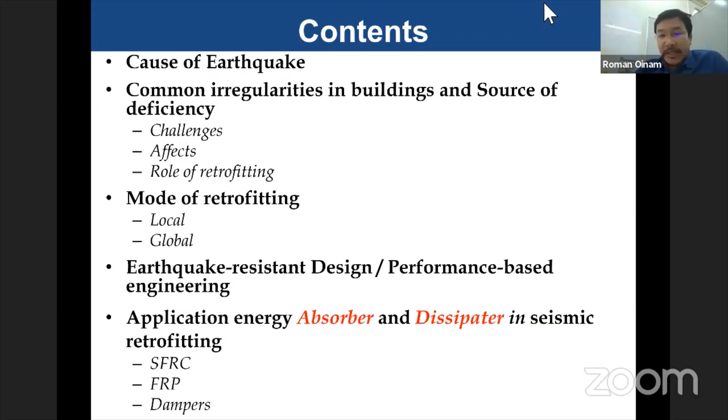First, let's focus on how earthquake came into the picture. Many people already have personal experience of earthquake in real life, and some of us don't have that type of experience. So earthquake can be classified into two ways: one is natural and one is man-made. Under natural, tectonic movement is one of the major causes for earthquake, along with volcanic eruption and rock faults. These three are the major contributions from the natural source point of view.

And from the man-made point of view, like a blast, reservoir induced, and mining induced - these are the man-made earthquakes. So for me, I will focus more towards the natural based earthquake, especially this tectonic movement.

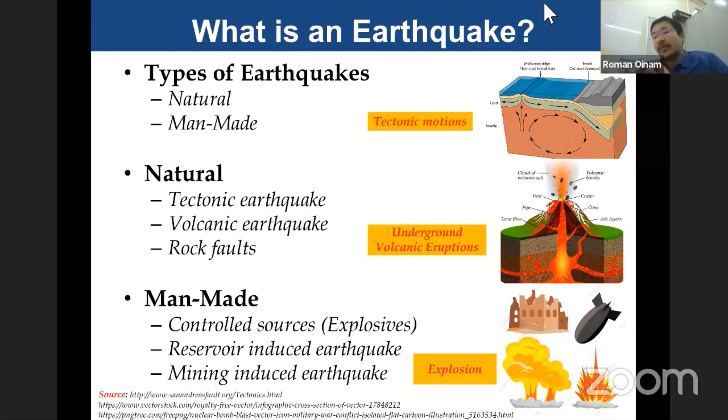Before coming to tectonic movement, let's look at the past history of our Earth. If you look back 225 million years ago, our Earth's crust was a kind of solid plate, interconnected. Inside our Earth, the inner core and mantle area is a liquid base, and highly radioactive material. Due to Earth's movement, the inside liquid keeps moving in different directions, and due to this radioactive element movement, positive and negative polarities develop, and due to that polarity, the plates are moving relative to each other - some are repelling, some moving away from each other.

That movement started a long time back, and due to that movement 135 million years back, the plates started splitting from each other. Coming to 65 million years back, the plates moved further apart. So this is the current status of our Earth, and right now our country is here. This is a small history about our Earth's crust.

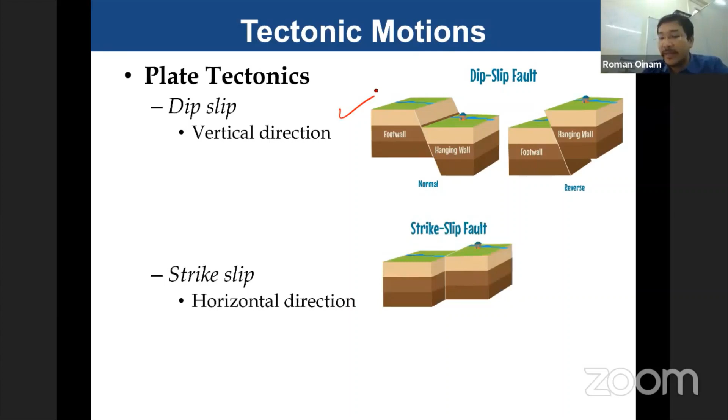Now let's come to tectonic movement. Due to Earth crust movement, some plates are repulsive, some collide, some slide, and due to sliding, earthquakes might be caused. This sliding can be classified into three ways: one is dip slip, meaning vertical direction, where plates slide vertically; second is strike slip, a horizontal type where plates slide horizontally; and third is oblique, a combination of vertical and horizontal. So it's quite complicated - based on this movement, different types of earthquakes come into the picture.

Today I will not talk very deep about these earthquakes. There's S wave, L wave, different kinds of waves, and these waves will be generated based on this type of deformation.

Dr. Romanbabu, sorry for interruption - there is a background noise that is coming, could you please check? Okay, sure, somebody is speaking I think. Otherwise use earphones so that it's clearer.

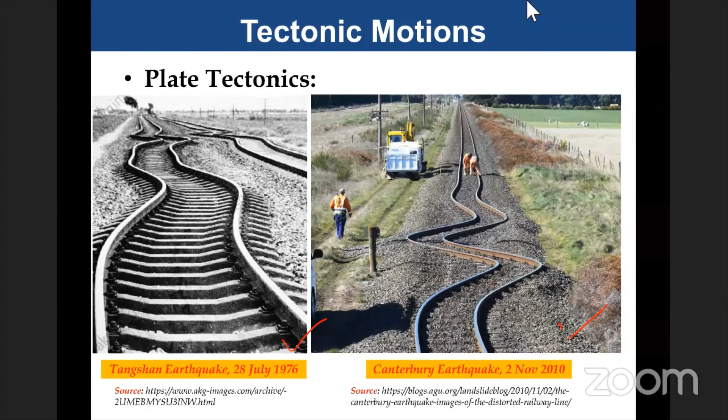No noises at this moment. So now again some of this tectonic movement can be observed. These fault lines, actually the two tectonic plates might be merging with each other, and that merging can be visible from the clear eye also. So some are visible, some are not visible.

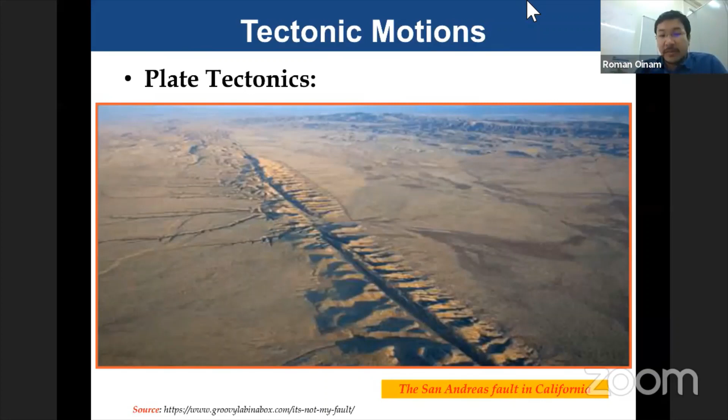Now coming to the Indian scenario. As I mentioned, 225 million years back the tectonic movement started, and the Indian plate, which was quite new, kept moving towards the Eurasian plate due to that movement. The Eurasian plate is on this side and is quite old compared to the Indian plate. Every year the movement is about 5 centimeters per year, and at that speed the plate is moving.

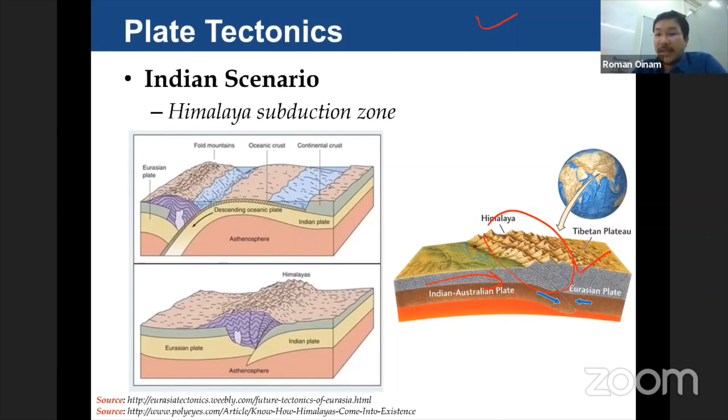So due to that, once an earthquake is generated from the crust or mantle region, the earthquake wave will be generated in multiple dimensions, and it might be a surface wave or a body wave. In case of the surface wave, it comes on the surface, and based on whether it's surface or body wave, the failure pattern in the structure is also different.

I'll give you one example of how an earthquake occurs and how this wave is generated. Sometimes we hear the terms aftershock and foreshock. The foreshock occurs before the major earthquake hits, at least a few seconds before, when some small tremor might come. That's called a foreshock. Aftershock means just after the major earthquake, some small intensity earthquakes keep being generated. That is called an aftershock.

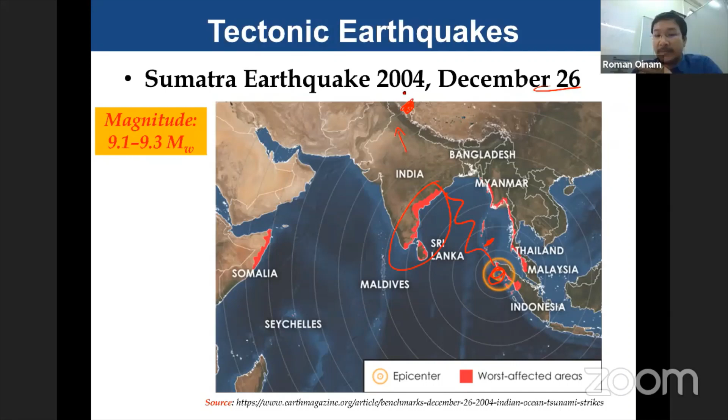The epicenter of the earthquake is here, and the wave movement moves in such a way that the earth's plate moves in a wavy form. Finally, the Indian plate moves towards the Eurasian plate, which is resisting here. Here the energy is quite high, but by the time the wave reaches here, the energy is low. Due to that low energy, at this collision portion the plate is not able to move inside but was holding. Due to that holding, you know what happened.

This is the tsunami affected area. There was also an earthquake in 2005.

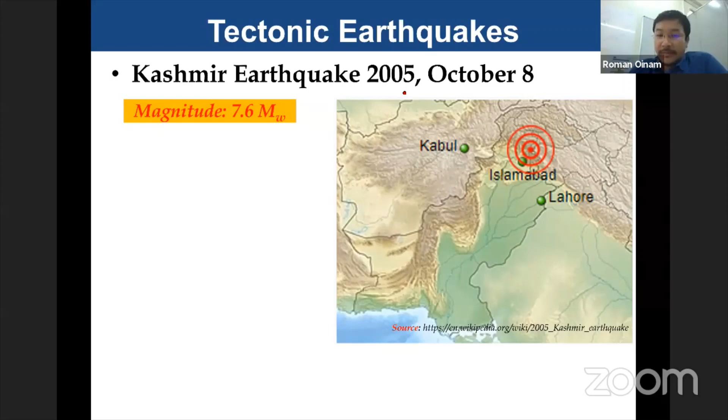This is called the Kashmir earthquake. And you know what happened in this earthquake?

If you look in the gym, we play such rope games for workout. When you apply the amplitude, it slows down and finally diminishes. Like that, when the earthquake wave came here, it somehow slowed down, but there was an obstruction, and the wave tried to go down but was not able to move inside due to this restriction. The energy kept accumulating, and finally after almost a year, from 2004 December to 2005 October—almost 10 months—energy kept accumulating, and after reaching a threshold point, suddenly this portion goes inside and becomes a flat plate. That's when the earthquake was generated.

Some of us already have this idea, and some might not. If you look at the Kashmir earthquake and the Sumatra earthquake, they are correlated. Some might think about independent versus dependent earthquakes. The Kashmir earthquake happened because of the Sumatra earthquake. So in every earthquake, some are correlated and some are non-correlated.

This is the affected area during the Kashmir earthquake. This entire valley was diminished. This is a small overview about this earthquake, how much danger there is in an earthquake, and how structures behave during the earthquake.

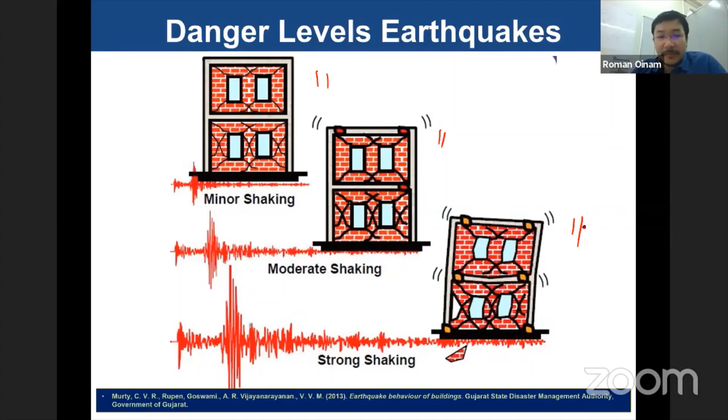How to tackle such problems in upcoming earthquakes, how to resist, and how to make the structure safe—that's the role of our rehabilitation and retrofitting. Finally, I'll go in that direction.

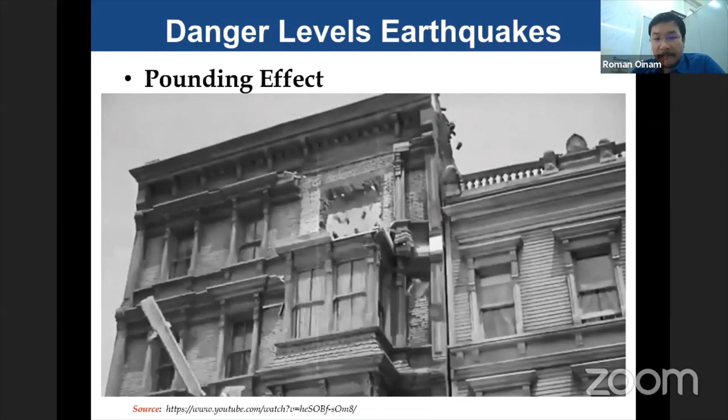In these two buildings, both structures have different story heights, and the shorter structure is hitting the middle of the higher structure—a very soft area. This is called the pounding effect.

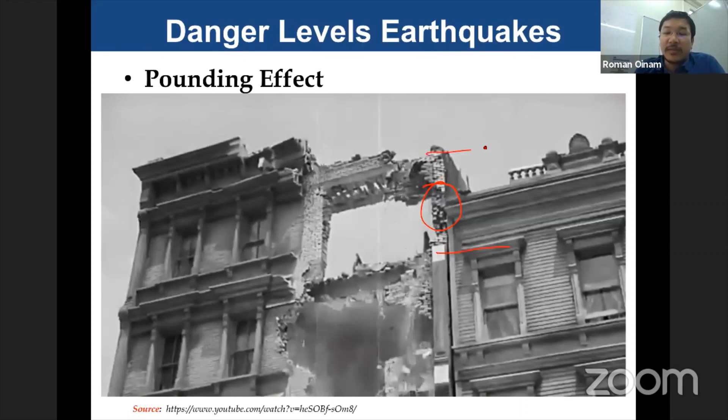But if you construct the story heights at the same level, there should not be such failure. We should be very careful, especially in town planning and municipalities, to give proper instructions when making town planning policy—structures should be at the same level. Otherwise, your structure design might be doing a very perfect job, but during the earthquake, due to this pounding effect, your structure might still collapse.

In another concern, the earthquake is very difficult. After following all the design criteria, still we can't say whether a structure will be strong or not.

This is one of the market complexes in Imphal, and there was an earthquake on January 4, 2016, of 6.7 magnitude. The market complex was constructed and inaugurated in 2006, so just 10 years into its life, that 6.7 magnitude earthquake came.

This market is quite famous, especially for the ladies, and thousands of people gather there at one time. Fortunately, the earthquake came in the early morning around 4:30 a.m., and because of that, no one died, or the number of casualties was very less.

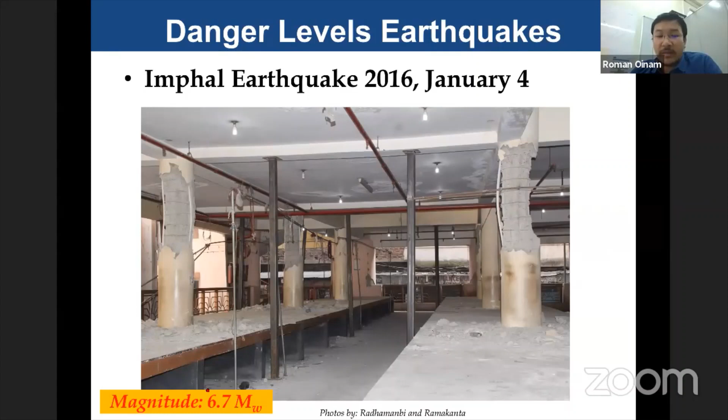But if you look at the structural performance, the entire column got damaged. The structure did not collapse, but columns were damaged severely. If you look very closely at this column, the stirrups as well as the main reinforcement were provided as per the design, and even the construction quality was quite good, but still the structure got damaged.

Such a typical observation during the earthquake always causes confusion to the designer about what to do. After following the code practice, still the structure got damaged, and in that condition, what type of precaution needs to be taken? This structure got damaged specifically because of the soft story mechanism.

In a later stage, I will explain what a soft story mechanism is and how to avoid that soft story. I will explain that very extensively, along with one more aspect.

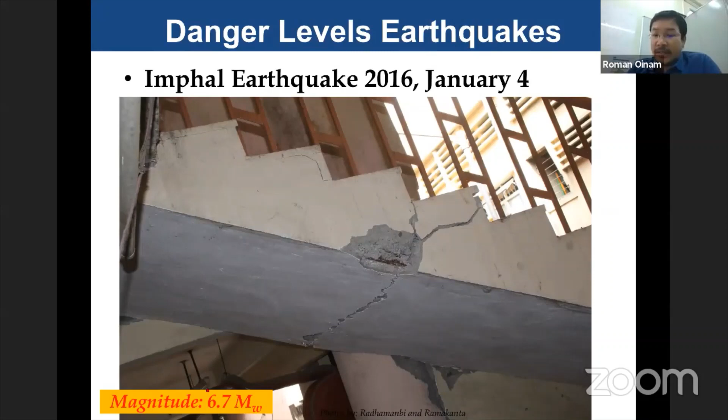Now coming to the Indian seismic code. The Indian seismic code has classified 4 earthquake zones as per the current scenario: seismic zone 2, 3, 4, and 5. But in the older seismic code, there was also a zone 1, which in a later stage got merged with zone 2 and finally converted into zone 2.

Now we are in Tirupati, which falls under seismic zone 3. So whenever you do any design, of course the South Indian regions are quite stable from a seismic point of view, but still we are under zone 3, so we have to consider earthquake loading while designing the structure.

So that's the overall information about seismic behavior of structures - I gave a small briefing. I did not spend much time on earthquakes since most of us might already have that information, that's why I didn't dwell on it much.

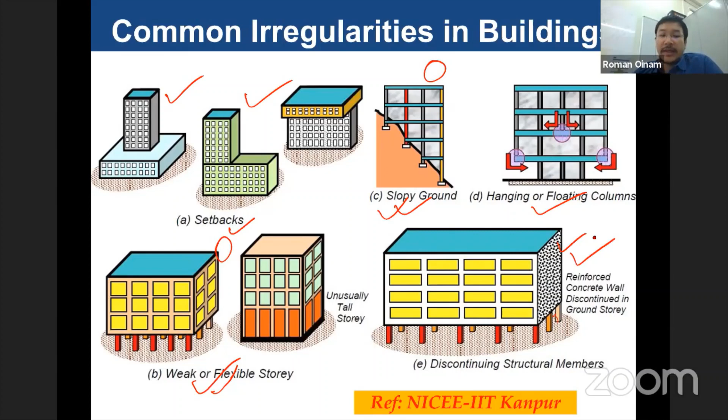Again, this is another kind of irregularity. The irregularity might be in the plan area, or in the structure, it might be too long, too tall, or too large. So this can be converted into a simple small structure, making it an easily controllable structure.

But in case of a tall structure, there is no separation method available. So what to do then? How to control this vibration? During the earthquake, the structure will vibrate in different modes. How do we control that type of movement? And even for this mass level structure, the lateral load carrying capacity will be quite high. So how to tackle such issues?

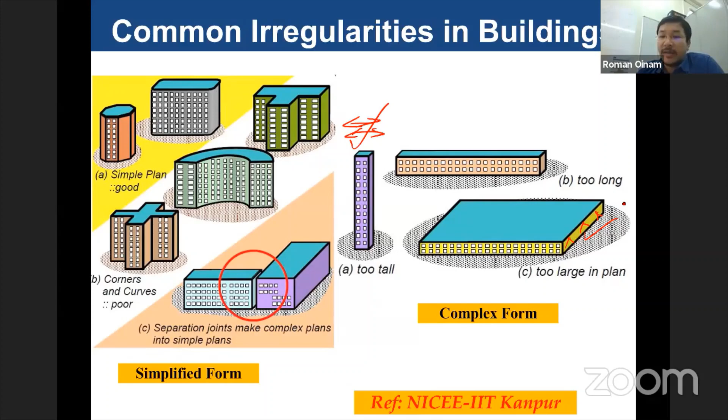At that time, the energy dissipation system comes into the picture. In new construction, if you do some modification in an old structure, that might be called rehabilitation, or it might be called retrofitting. But if you use the same method in new construction, that will not be treated as retrofitting, but will be considered a kind of dissipator system. That's a separate section, which I'll cover along with performance-based design at a later stage.

So now, some of the irregularities again, repeated information. Why may irregularity create issues in the structure? Because if you have some plan irregularity, the center of mass and center of rigidity will act in different ways. So some eccentricity E will be developed, and due to that eccentricity, torsion comes into the picture. Once torsion exists, the failure mechanism of the structure becomes quite complicated - it will not fail only in shear, or only in flexure.

There will be some combination of shear as well as flexure coming into the picture. So at that time, how to tackle these issues? That is not so simple, it's not that straightforward either. I will cover those things also at a later stage.

One of the major issues in existing buildings, those constructed a long time back, is that ductility is a major concern. Why is the structure not getting ductility? Because the construction quality might be poor, and ductile detailing might not be there. So why is that ductile detailing needed?

See, if you look at this column, diagonal shear failure is observed here. If you look, the reinforcements are quite small in diameter, and the concrete quality also doesn't look so good. To get good ductility, the stirrups should be provided in the proper set, with a 135-degree angle provided enough. That is already recommended in IS 13920 as well.

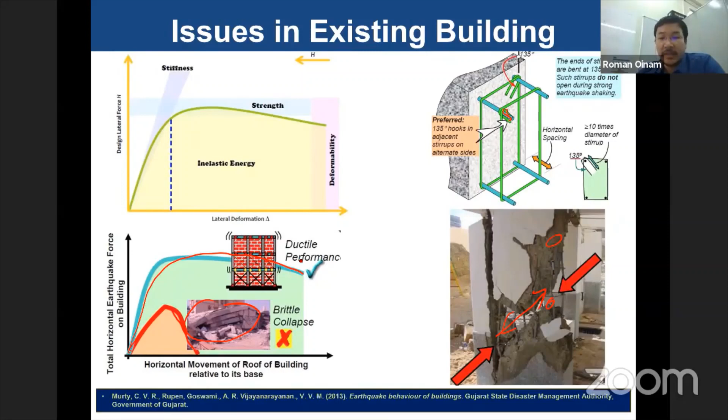At any condition, can we use any kind of retrofitting technique to get ductility? The answer is no. Actually, you have to think about what type of structure this is, and what type of deficiency is there, and based on that you have to choose the retrofitting scheme. So I'll explain - now the same thing is here.

How to select your retrofitting method? Retrofitting selection is quite complicated. First of all, before moving to retrofitting, you have to look at your structure properly. After looking at the structure, you have to analyze what type of deficiency is there - it might be flexural deficiency, shear deficiency, axial deficiency, or a combination of these three. Based on that, you can choose one.

There are many kinds of retrofitting techniques available, and each has its own objective, advantage, and disadvantage. Based on that, you have to choose one of them. So you are not supposed to blindly choose any retrofitting technique. If you choose a retrofitting technique without understanding the basic mechanics, instead of improving structural performance, your structure might suffer more shear, or even collapse, if you are not choosing the right method.

Now I can mention the available retrofitting methods, which can be classified into two ways: local and global. Under the local, many methods are there, and under the global, again many different methods are there. So I will explain what is the local method and what is the global method.

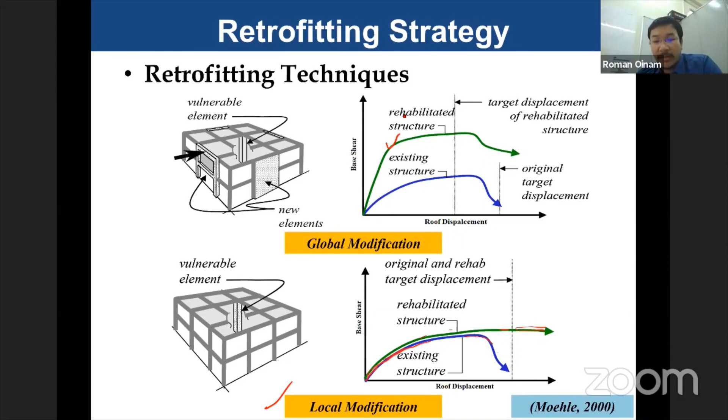From the local point of view, these are some available methods we adopt for retrofitting: the first one is concrete jacketing, steel caging, FRP wrapping, or maybe steel fiber concreting. Those are the kinds of local modification.

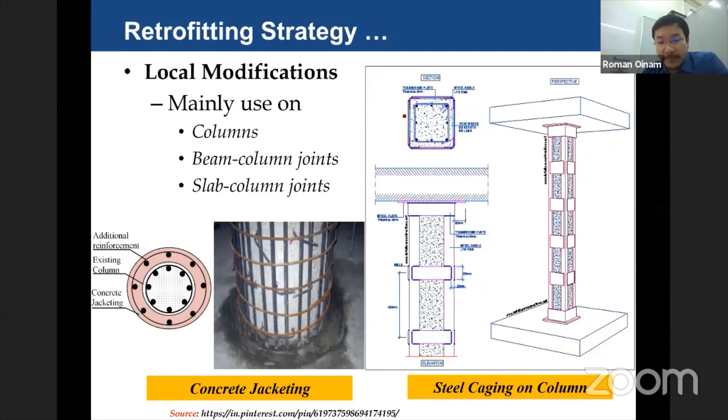When it comes to global modification, the energy dissipation systems, like friction dampers, yielding dampers, viscous dampers, or isolation systems, are the kind of global modification methods. Many other devices are also there, so I can't cover all the devices here; I've mentioned some of the popular ones. What is yielding and what is viscous, I will cover in a separate section along with the retrofitting case study.

Now, after understanding local modification and global modification, let's try to understand two terminologies: energy absorber and energy dissipator. What is the meaning of energy absorber and energy dissipator, and what is the role of these two terminologies in the field of seismic strengthening or seismic retrofitting?

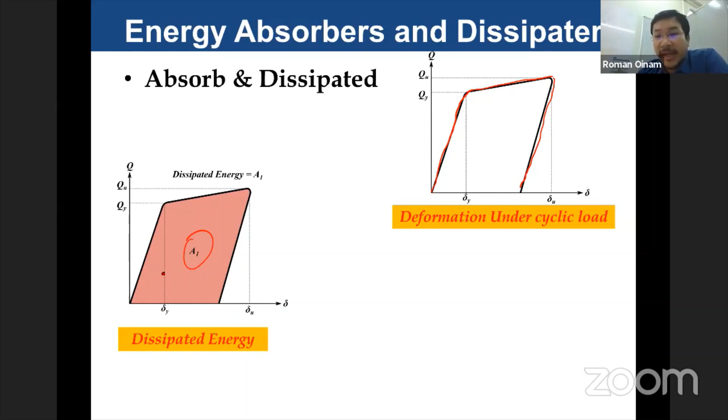To understand this terminology, first we have to look at the cyclic behavior of member deformation. If you look here, this is the loading, then hardening, and unloading. If you look at this entire loading profile, you can calculate the area. The area under this plot I represent as A1. This is the dissipated energy, sometimes called hysteresis. The area under the hysteresis is the dissipated energy.

But what is the absorbed energy? It is A1 plus this A2. This is the absorbed energy.

Usually the absorbed energy concept applies in the field of local modification, and the dissipated energy concept applies especially for the damper-based global modification. This applies for the global base, and this for the local base. But it is not mandatory—most conditions belong to this global and local pattern. Now, dissipated energy is sometimes called a hysteretic device.

Now, under the energy absorber, there are various methods, but here I highlighted only three. First one is fiber concrete. Fiber in the sense it might be steel fiber or some natural based fiber. Any kind of fiber concrete belongs to the energy absorber. Second is FRP, and third is high performance concrete, which also is a part of this energy absorber. But in today's talk, I'll concern only about fiber concrete and FRP. So high performance concrete will not be covered.

Again, when it comes to the energy dissipator, the passive energy dissipators sometimes we call a passive control device. So some of you might have an idea of passive control and active control. So what is the difference between active control and passive control?

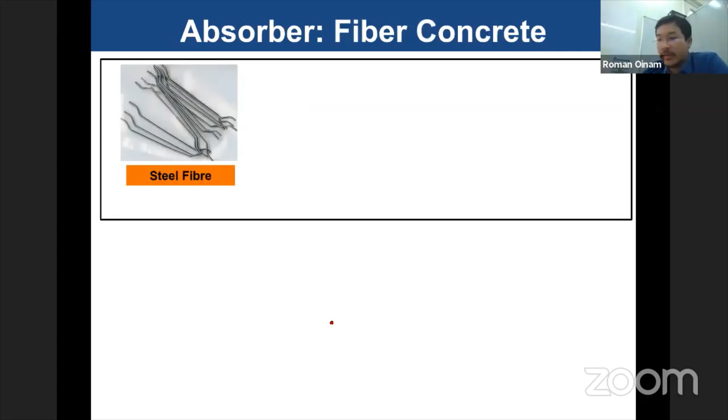So now, from the energy absorber, first of all, let's talk about fiber base. After fiber base, FRP will be followed. Then I will move to the energy dissipator capacity.

So in the fiber base, steel fiber is one of the methods used very effectively in different fields. Steel fiber is made because of the discontinuity - lots of discontinuous wires we put in the concrete, and concrete's bonding capacity is improved based on that. Advantages are it reduces crack impact and improves fatigue resistance, and reduces shrinkage and improves toughness by delaying crack propagation. This is the advantage of steel fiber concrete.

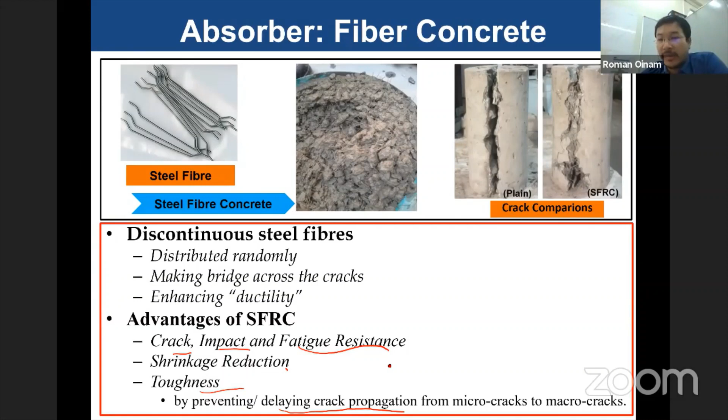One very simple concept that people always take wrongly about steel fiber - they think that steel fiber is used to improve strength, but actually that is not correct. I'll give the explanation along with a diagram.

First of all, let me give some applications of steel fiber. In terms of application, steel fiber is mainly used for pavement, slab on grade or flooring, tunnel lining, or maybe bridge deck. These are the major applications of steel fiber concrete.

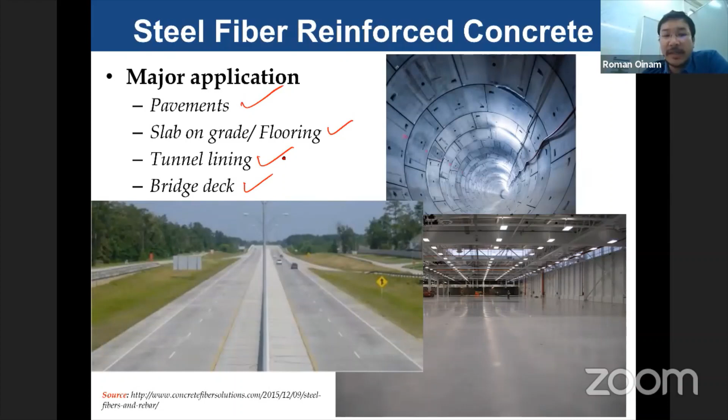Again, there are different types of steel fibers - straight steel fiber, hook end, paddles, and even within the hook end different shapes are there, like toothing type surface and wavy type. But the hook end type is one of the most preferable in the industry because it's very easy to get in the market, and its bonding efficiency is quite high compared to others.

Now I'll try to explain the stress and strain relationship of steel fiber. Just now I mentioned that people think steel fiber is used only from a strength point of view. Actually, if you compare steel fiber concrete and normal concrete, the variation in strength will not be much different. Of course steel fiber gives some higher strength, but it is not so significant. But if you look in terms of deformation capacity, like strain, steel fiber performs far better than normal concrete.

And concrete and bricks are treated as a kind of brittle material. To find out this performance, we simply do cube testing or cylinder testing under compressive load.

So under the compressive load we can find the overall stress-strain behavior. The steel fiber will give a very high strain, and even after the failure, the members are not breaking apart from each other, still holding together. So this is the advantage of the steel fiber.

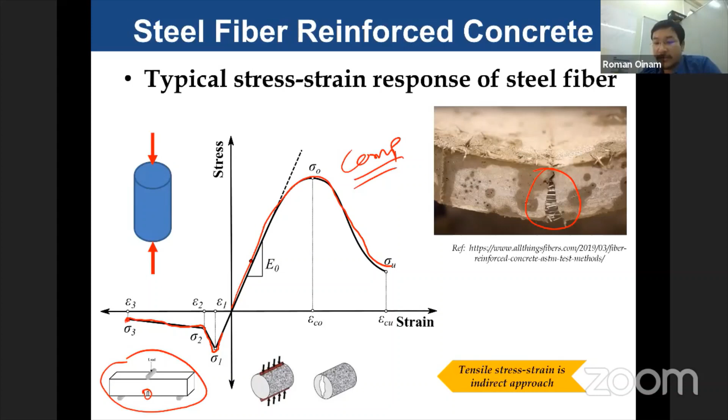So we should be very careful when we use steel fiber versus plain concrete, since some tests are not common between them. As of now, what I've discussed is steel fiber used for new construction, such as highway construction and flooring and lining of tunnels.

But what is the role of steel fiber in seismic rehabilitation and retrofitting? The steel fiber gives much higher capacity from a shear point of view, but in a flexural point of view it's not very significant. From a shear point of view though, steel fiber contributes a lot.

Especially when you look at old structures not designed for ductile detailing, we call that type of structure non-ductile concrete. In those non-ductile concretes, especially at the beam-column joint near the plastic hinge region, the chance of concrete crushing and damage is quite high. How do we improve this crushing or spalling of concrete without much modification to the structure? That's where steel fiber can take a major role.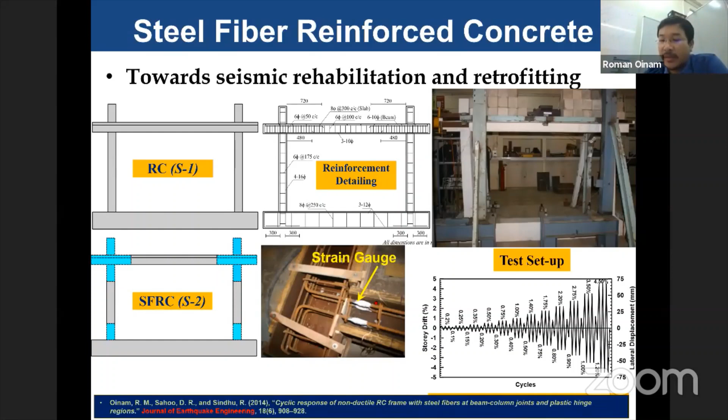So I did a case study. In this portal frame, the blue highlighted areas are the beam-column joints, which are the plastic hinge regions at the column to foundation region. The existing concrete was removed and new steel fiber concrete was put in its place. To evaluate the steel fiber's performance, the same dimension frame was also cast as plain cement concrete, and both frames were tested under lateral cyclic loading. We compared the advantage of steel fiber versus the disadvantage of plain concrete. Now let's watch a small video of how the frame behaved during the experiment.

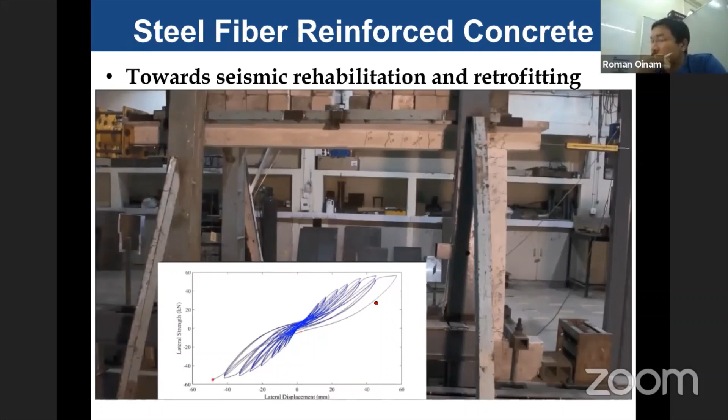Yeah, this is the steel fiber frame. I did not show the plain concrete frame separately, but it looks more or less the same. This section is the steel fiber portion, and this is the plain concrete, and we did a comparison of crack propagation as well as width of the crack.

If you look at the steel fiber specimen, there are lots of micro cracks, but a major crack does not exist. In case of plain concrete, micro cracks are very few, but major shear cracks develop, and this is more dangerous than micro cracking.

So sometimes we prefer lots of micro cracks because they distribute the stress. But when there's a major crack, the total damage is concentrated at one point, and the chance of collapse or fracture is quite high. This is the advantage of steel fiber we observe here, it distributes the stress uniformly.

Comparing in terms of hysteresis, this is the hysteresis response of the normal frame, and this is the hysteresis response of the SFRC. In terms of backbone performance, steel fiber has slightly higher strength, but its ductility is better than normal concrete.

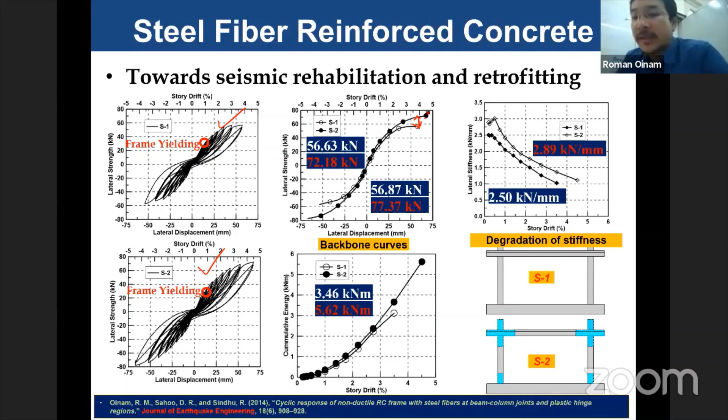We applied a similar concept to the coupling beam, which is the energy dissipator region for the reinforced concrete shear wall. Here also we utilized steel fiber to see how much energy is released effectively compared to normal plain concrete, and this is a plain concrete specimen.

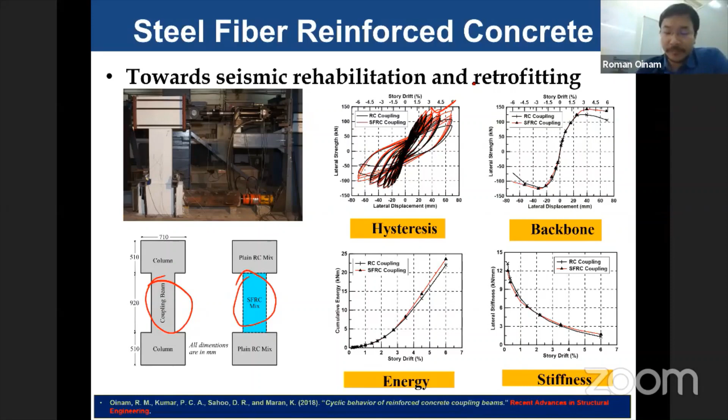These are the comparisons between plain concrete and steel fiber. The red one is steel fiber and the black is normal plain concrete. Of course, the steel fiber has much higher performance than the plain concrete. This is the coupling beam test you can observe here.

The damage was totally concentrated at this bottom region, and due to the steel fiber, the concrete spalling, I did not show this for plain concrete, but in plain concrete most of the concrete is already spalled out. In steel fiber concrete, there is some extent of damage, but spalling is still very less compared to plain concrete. So this is the advantage again.

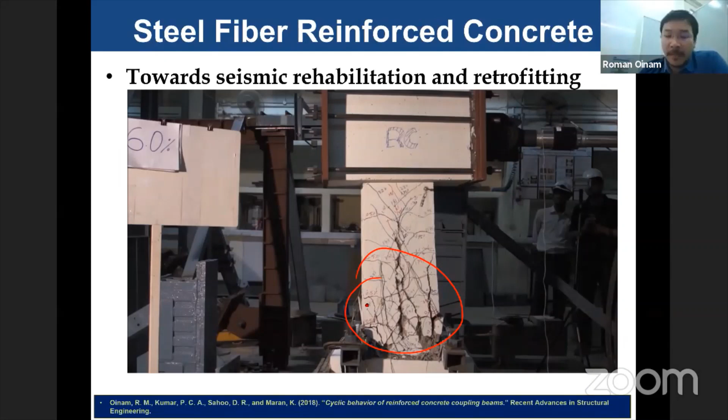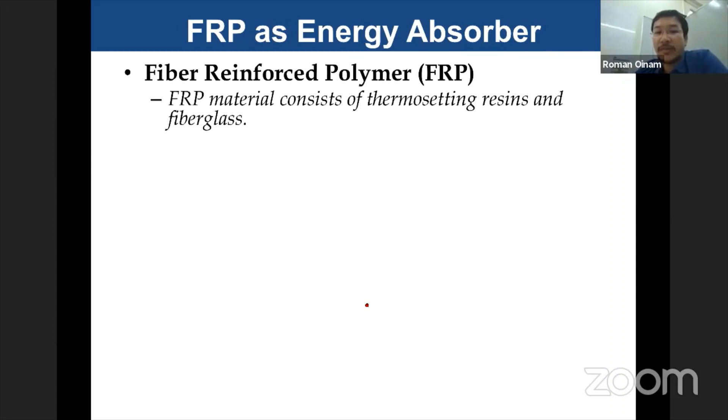Now we already know something about steel fiber. Let's come to FRP, the FRP as an energy absorber. What is the design philosophy and basic philosophy of FRP wrapping, and under what conditions should we use FRP, that we have to discuss here.

FRP has advantage in terms of high mechanical property. Normal steel reinforcement, the yield capacity is Fe415 meaning 415 MPa, Fe500 meaning 500 MPa. But in case of FRP, it's a very thin layer yet the yield stress capacity can be 700 MPa, sometimes 900, sometimes 1015 MPa depending on the grade of fiber. It is far higher than normal reinforcement, has high moisture resistance and very high chemical environment resistance. The only disadvantages are that it's very sensitive to heat and it's not economical, it is very expensive.

What is the logic behind FRP utilization in the industry? We talked about steel fiber, now coming to FRP, both have their own applications. In case of steel fiber, we use it only for the ductility point of view. FRP can be utilized in multiple dimensions.

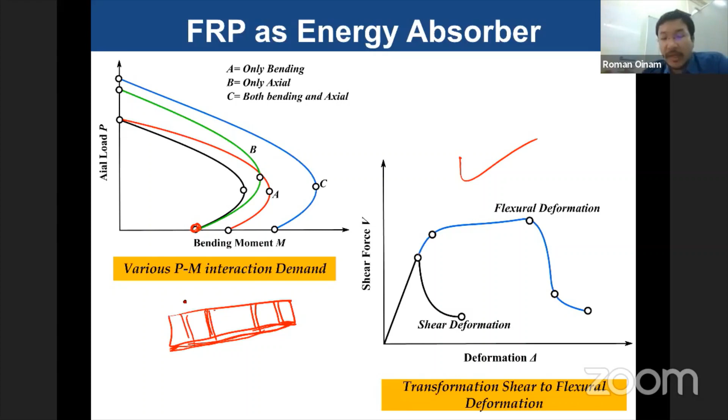So at that time, how to wrap your FRP? In this condition, there might be a beam, so you have to provide it differently at the bottom along the axis of the member. That's how you can improve the flexural capacity, and it can also improve the shear capacity by wrapping across the beam. So there are different wrapping orientations, and accordingly you have to choose it.

Some of us use FRP wrapping without much understanding of that basic principle. Simply we understand that if you wrap something, there will be some improvement, but what type of improvement is there, that you have to understand, and what type of improvement is required for the structure. A structure might require shear improvement, but if you improve only bending, what is the use of that? There is no use for that wrapping method. So accordingly, you have to utilize the PM interaction curve and the M-theta curve very effectively before choosing the FRP wrapping orientation.

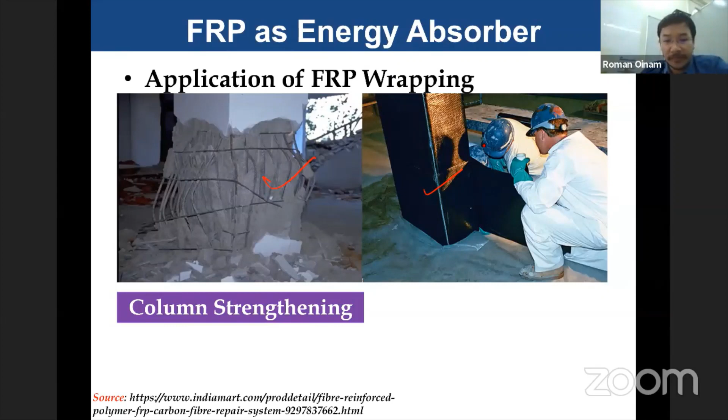As a case study, I did a column strengthening at the frame level, and one of the most important things after doing the design is that executing it in the field is quite tough. Design is a different strategy, and execution is a different strategy. In case of steel fiber, you need a proper mix design, and there should be enough workability to fill the concrete.

But in case of FRP wrapping, surface preparation is very, very important, because FRP is a kind of membrane that is applied above your column. If you have a rough surface, there is a chance of air bubbles inside. Once an air bubble exists in the FRP, there's no use of that - it can't provide any structural benefit. So finally, after strengthening, the FRP and concrete should be a kind of embedded member together.

Okay, there should not be any separation in between. If an air gap exists, there is no use. So for that, the surface preparation is very, very important.

So in my case, this is a damaged column. The damaged area concrete was totally removed, and epoxy was applied before putting the new micro concrete. With the help of the micro concrete, this damaged column has been transformed into this new column. In terms of surface, this is very smooth, and now the edges have been cut and converted into curvature form, and finally we wrap the FRP.

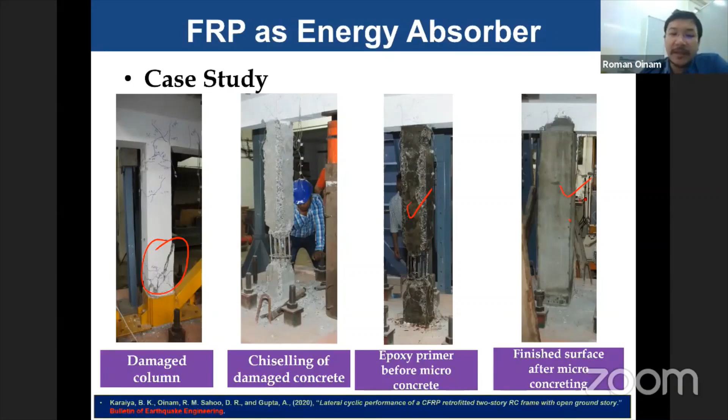So if you plan to wrap the FRP, the surface preparation is very, very important. Without proper surface preparation, even after doing a lot of hard work, you will not get any benefits. So please be careful about this.

But such things during the design of the FRP, we do not discuss such issues. So this is the strategy for the execution in the field.

So this is the frame overall view, and at the end of the experiment, we observed such kind of cracks at the beam column joint, and this is the overall hysteresis behavior of the response.

Okay, now in terms of the energy absorber, I picked up two topics. One is the fiber and one is the FRP. So these two I have covered.

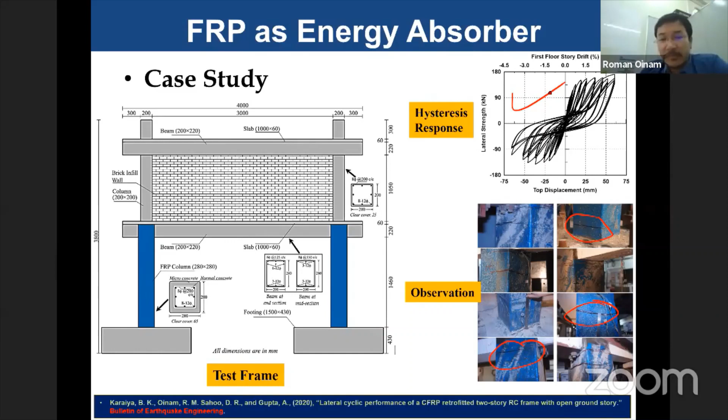Next level, let's move to the energy dissipator, the one which I explained in the earlier condition. The energy dissipation device has, again, same information: the friction damper, viscous damper, and the base isolation, and the yielding damper.

So these three, I will not cover in detail. The friction damper, viscous damper, and the base isolation will not be covered. So I will focus more on the yielding device.

The reason is that the yielding device is part of the passive control, and it has much more advantage compared to the other methods, in the sense that if you look at the viscous damper, it is very expensive. In terms of efficiency, the viscous damper has one of the highest efficiencies, but the difficulty with the viscous damper is that it's very expensive.

So normal people might not be able to afford that cost. And for the friction damper, the disadvantage is - okay, it's easy to install, easy to fabricate, but the only concern is that the damper is going to be exposed to the normal environment, and in normal environmental conditions, the member will get rusted, and during earthquake time or maybe cyclone time, the damper might not be activated properly because of this corrosion and such things.

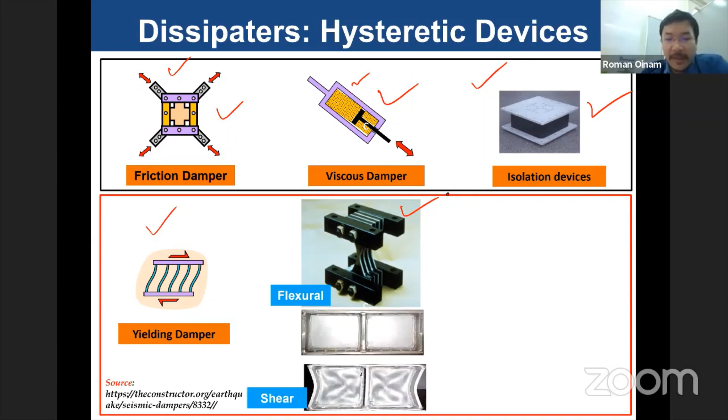So the yielding may occur in three ways. One might be flexural - this is the flexural based yielding damper. Second is the shear based yielding damper, and the third is the axial based yielding damper. Sometimes the flexural and shear can be combined, and you can fabricate a damper that is both flexural and shear type.

So now when you talk about the yielding damper, try to understand the different yielding mechanisms: axial yielding, flexural yielding, and shear yielding. Under these three categories, different types of axial, different types of flexural, and different types of shear dampers are also available.

Some commonly available things - I'll just give the extensive information here, so please have a look. This is the tuned mass damper. The tuned mass damper is a kind of device to control vibration of the building, and especially this type of damper is installed only at the high level of the structure, not at the ground level.

So I'll explain how to use such a technique and in what situation, at a later stage along with the graphical presentation.

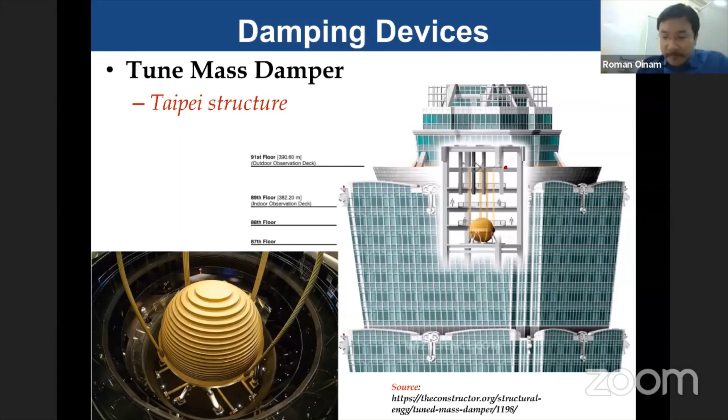Again, the base isolation. This is another picture I took from an internet source, like a friction damper. So in real conditions, how does the friction damper look, and please see, this is the damper size compared to the height of the person. So how big the damper is.

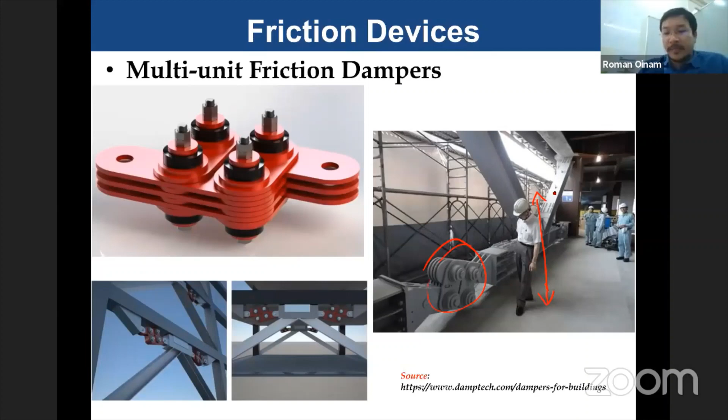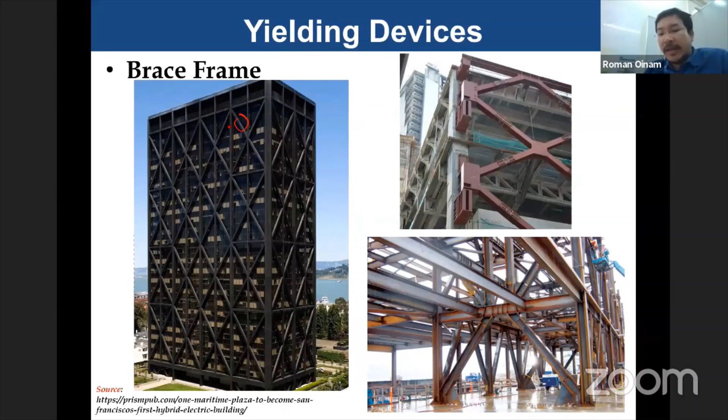Now coming to the yielding device. Among the yielding devices, firstly I pick up the brace system, the bracing system. The bracing system is one of the oldest methods. If you look back at the history of bracing, it started before many metals were used. Bracing started from our ancient age, like they used timber or bamboo as a kind of bracing member. But now I will not look at it from the timber and bamboo point of view. If you look in terms of metal, the bracing member is highly effective in terms of lateral load resisting, but it has some disadvantages. It is highly effective under tensile load, but under compression load there is some buckling issue. Due to this buckling issue, the efficiency is not so high.

Now this axial-based damper's hysteresis performance can be improved with the help of buckling restraint. So a new device developed based on that is called the buckling restrained brace, and in this brace frame the hysteresis behavior will be symmetric. In case of the normal buckling frame, only the tensile portion will be highly effective and the compression portion is not so impressive. But in case of the BRB, both tensile and compression will have a symmetrical loading profile.

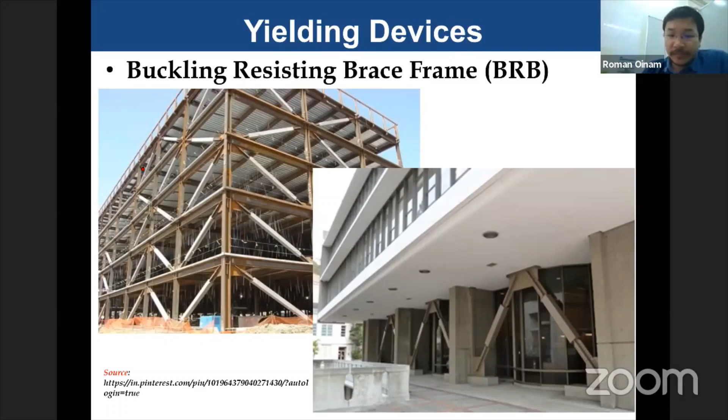The only issue in the BRB is sometimes premature fracture might occur. So once premature fracture occurs under the yielding action, under compression or under tension, then there's a chance of some structural instability being observed. But anyway, such issues can be rectified by choosing a proper cross section and a different high ductile material.

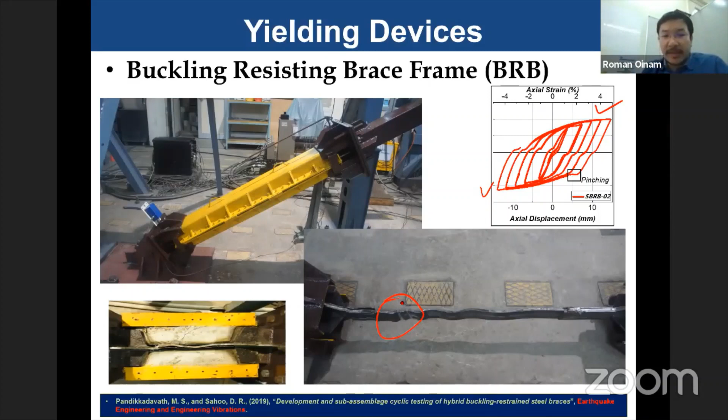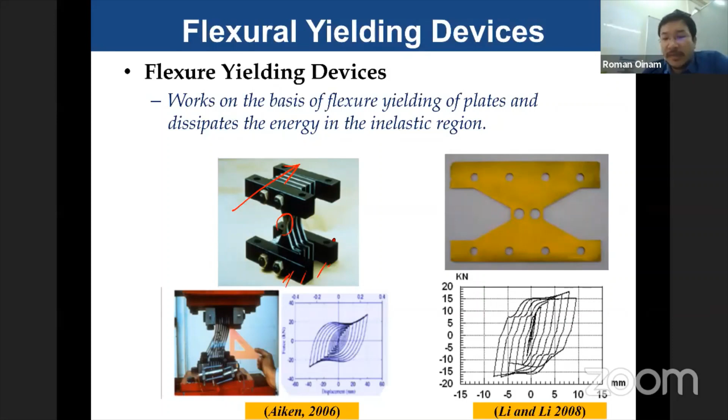In case of the axial condition, especially for the BRB, it has both a high energy dissipation capacity, and the only issue is some premature fracture might occur. So that is the only concern.

Now coming to the earthquake resistance design philosophy. We discussed different damper conditions and how to utilize those dampers in earthquake resistance design. Most of you are faculty, so you know what plastic design is. Under the earthquake, the structure will deform, and that plastic mechanism will occur. Once the plastic mechanism occurs, under the earthquake load, the hysteresis response will be shown.

This hysteresis response can be mathematically converted. Your input earthquake EI is equal to EK plus ED plus EA, where EK means kinetic energy, ED means damping energy, and EA means absorbed energy. Now this absorbed energy can be explained in terms of the elastoplastic region - elastic region plus plastic region. So it means elastic plus plastic.

Now if you rearrange the equation, this EA term is split further. Finally your EI is equal to, let's say, your damping energy also split into two ways: one is inherent damping and one is added damping, and the Eh term comes into the picture. This EP is replaced by the Eh.

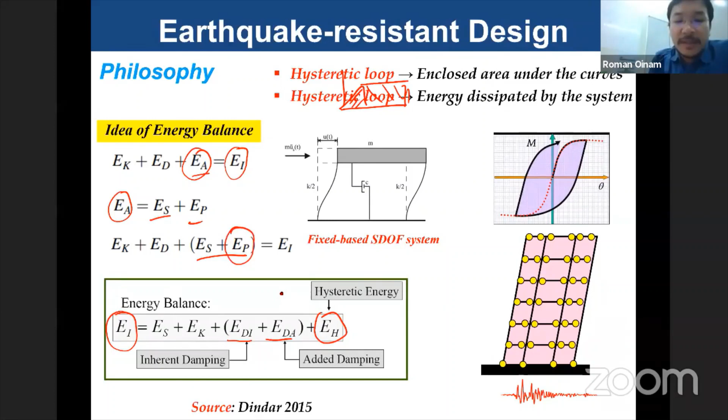So whenever you do any earthquake resistance design along with a damper, if you put some viscous damper, this ED will take care of it. If you put any kind of hysteretic device like added damping, or maybe base shear, base isolation, or bracing system BRB or any kind of damper, this Eh will take care of it. This is an energy balance concept. Based on this, the earthquake resistance design philosophy has developed along with these dampers.

This is a very basic logic, but sometimes most of us try to look at it in a different way, and we try to complicate things ourselves, making it a very complex situation. Here I just try to represent it in a very simplified way. Of course, when you try to find out Eh and EA, there will be extensive numerical calculation required, but here I'm just representing the philosophy.

So how do you find out Eh and EA? That's not a straightforward answer. For that, we have to do a lot of iteration, many procedures. So I can't give it in one line sentence.

Now coming to the types of energy dissipation devices. The same information I already provided, but here I'm coming to how to choose the energy dissipation devices for the seismic rehabilitation method - that's my concern. Again, energy dissipation devices can be classified into different ways: displacement based, velocity based, and other systems. Earlier classification was based on the working mechanism like friction, yielding, and viscous, but these can be majorly classified into three ways: displacement based, velocity based, and other system.

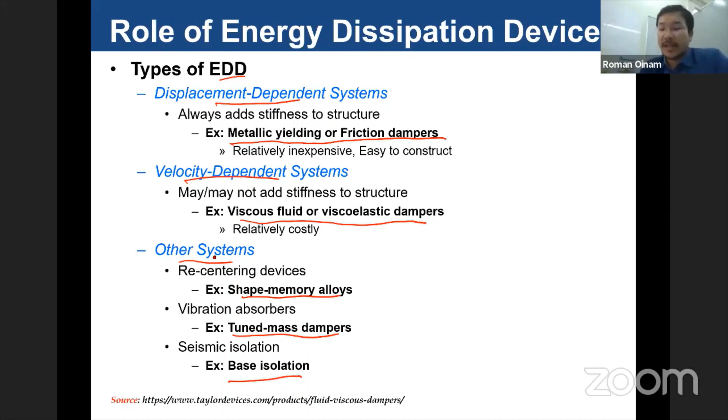Otherwise, you will not understand in the next slide what I try to represent. So why do we provide the damper? Because to control the deformation or drift. Anyway, I'll give proper explanation in the next slide.

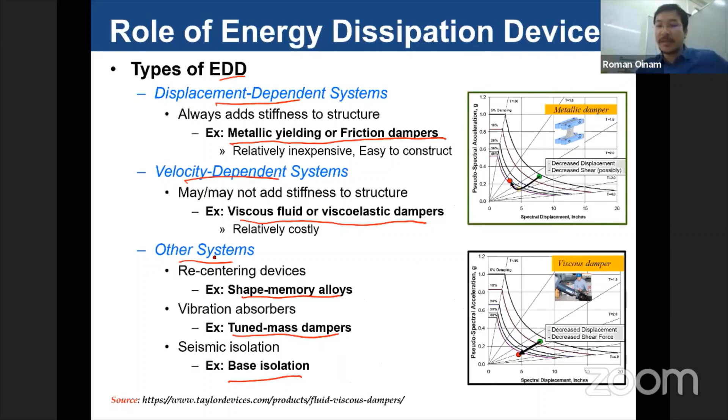If the structure lies on a displacement region, then you can choose a displacement-based damper. That will be one of the most suitable options. This is the basic philosophy of how to choose your damper.

Some of us simply try to design the BRB, try to design the bracing, or try to design any kind of friction damper. But this is the basic logic of why we design the damper based on the structure's demand, which you are finding out.

We are not designing the structure as elastic; we design for inelastic behavior but assuming elastic characteristics. So inelastic deformation occurs in the structure during a major earthquake, but the design method is based on elastic behavior, and inelastic behavior is accounted for indirectly. Member sizes are identified based on elastic design, with drift limitations and detailing provisions for ductility.

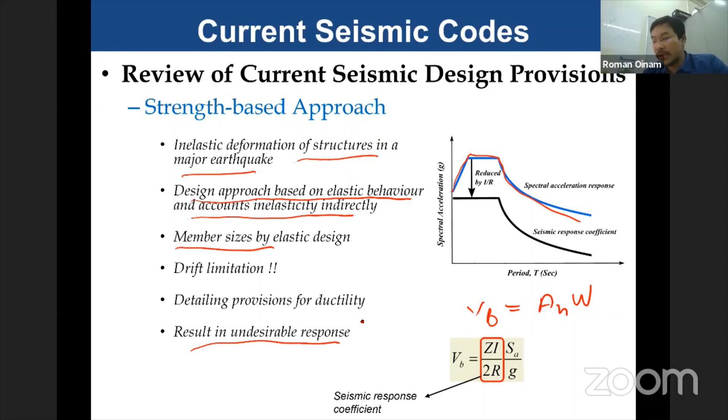For example, in the 2011 New Zealand earthquake, one of the buildings totally collapsed. This is one reason why we say we can't give any assurance about building design codes at this moment.

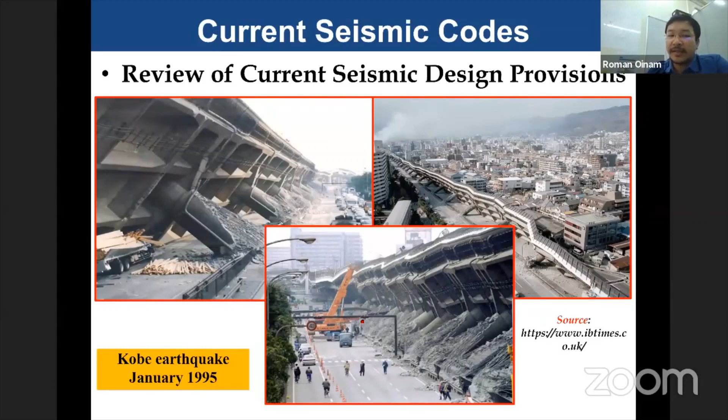Again, the same information: we did the proper design, but performance in past earthquakes was poor. In the Northridge earthquake, 70% of new steel buildings suffered connection failures. In the Kobe earthquake, more than 10% of new steel buildings collapsed. In the Loma Prieta and Bhuj earthquakes, several new RC buildings as well as old buildings also collapsed, questioning the building codes and design tools.

What are the drawbacks in the seismic design code, especially for the Indian context? I'm not talking about ASCE or European codes, but the Indian IS code. There is no clear information about rehabilitation of existing buildings—there's a small section but no extensive information. The design of mechanical equipment and special structures is also not covered.

There is also uneven performance of code-compliant buildings in recent earthquakes. In recent earthquakes, structures behave differently even under the same design philosophy. That's the point I wanted to cover here.

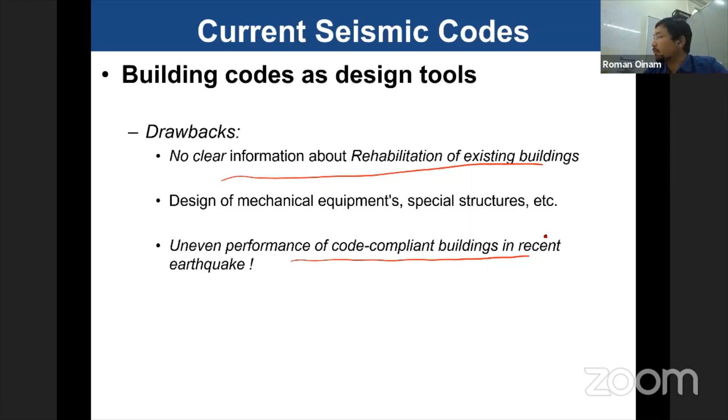Now coming to performance-based design. Most of us have heard the term performance-based design, or performance-based engineering design. Performance-based design was first developed based on the displacement approach, and the objective is that the structure should be safe and life should not be lost. The first performance-based design was developed based on the evaluation and strengthening of existing buildings, not new buildings. Currently we apply performance-based design for new building design, but the concept and evolution came only from the retrofitting of existing buildings.

That documentation first came as ATC 40 in 1996—the first document for performance-based design. Later it came as FEMA 273 and FEMA 356. These documents were updated, and finally it became ASCE 41. Here I wrote 2006, but the current latest version is the 2017 version.

As for performance-based seismic design, for a minor level earthquake, the building should remain operable and not be damaged extensively. In case of a moderate level earthquake, the building should achieve immediate occupancy level. For a very rare type of earthquake, it should reach life safety level, and such an earthquake should have only a 10% chance of occurring in 50 years. So usually we design for a 50-year lifespan of the building, with only a 10% chance of facing such an earthquake in that period. That's our performance objective.

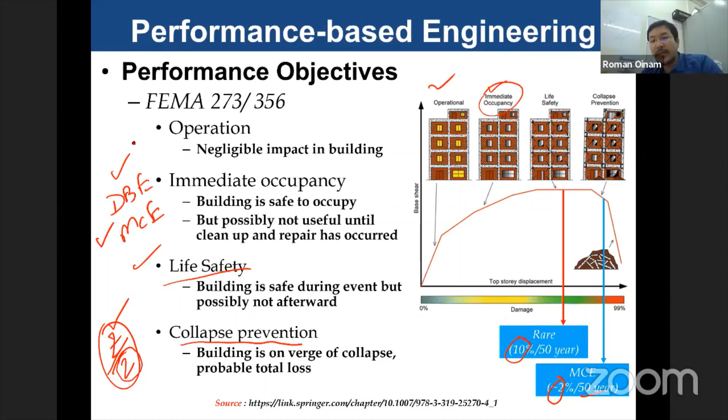I think yesterday one of the speakers already covered performance-based seismic design, so I will not spend much time on it. I'll move to the next level, corresponding to retrofit.

After defining the objective and how to evaluate the structure, you have to perform pushover analysis. This is the recommendation from FEMA 273 and FEMA 356. While doing the pushover analysis, you have to assign non-linear plastic hinges.

In case of columns, you have to apply PM interaction type hinges. In case of beams, you have to provide moment-curvature hinges. For both columns and beams, you can also provide a shear hinge. So these types of hinges you have to assign in the structure.

At the end of the pushover analysis, you will get a capacity curve. To find out your objective as per the seismic design code, you have to plot the seismic response spectra along with your performance curve. There will be a cross where the two curves intersect each other at one point—that will be the performance point of the building that you have to determine.

After covering this performance-based concept, now I'm coming to one of the irregular buildings. Among the irregular buildings I discussed in the initial phase of my slides, I pick open ground story as one of the irregular building types, and this type of construction is still commonly preferred.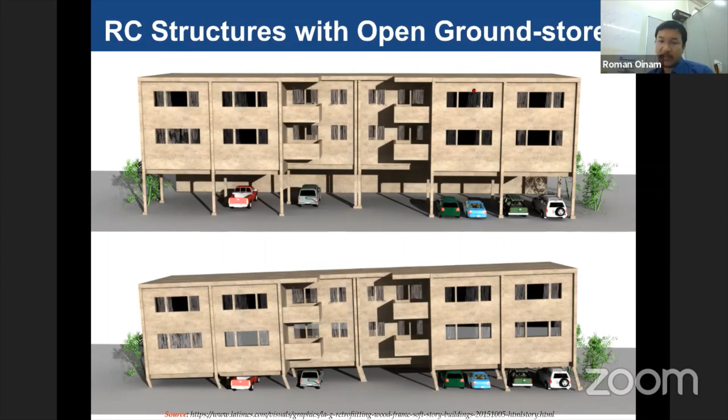This is because we get lots of space for car parking purposes, or maybe a garage, or many other aspects—we gain benefit from this. So we prefer to construct open ground story buildings, which have advantages in terms of functionality and architecture.

But after having this much advantage, there are also disadvantages. Those disadvantages are severe stiffness and strength irregularities. Due to such irregularity, the chance of building collapse is quite high, and this type of failure is called soft story failure.

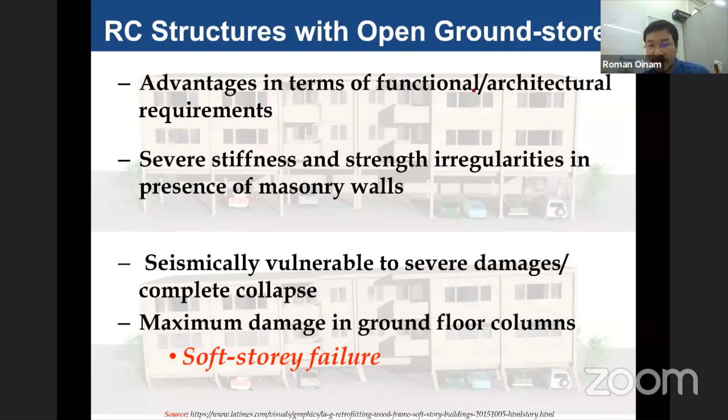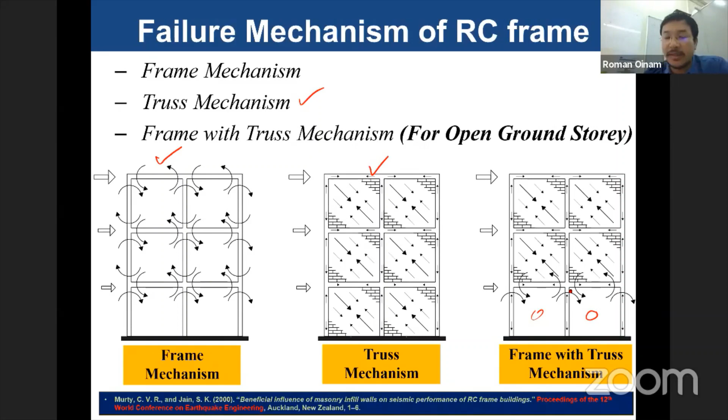Why is the soft story mechanism so complicated? I'll explain with mechanics. If you look only from the frame point of view, the failure mechanism is a frame mechanism. If you put infill masonry walls throughout the frame, the failure mechanics converts to a truss mechanism. Now if you remove this at the open ground condition, the failure mechanics become a combination of the frame mechanism and the truss mechanism. So the problem becomes more complicated—this is the failure mechanics of the open ground story.

The main issues in open ground story buildings are insufficient lateral strength, insufficient stiffness, limited ductility, and inadequate energy dissipation capacity.

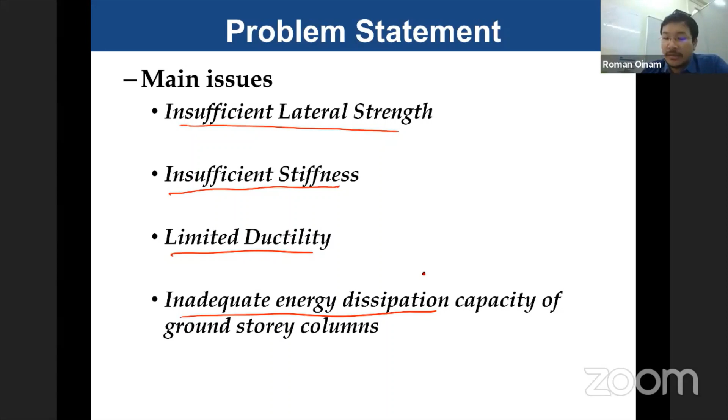These 4 points are the major issues in the open ground story, and to improve that we have to work on it. I explained extensively what is a shear yielding device and the flexural yielding device in the previous slides. Shear base has high strength and stiffness, flexural has high ductility. But for open ground story, ductility, strength and stiffness are all required.

So in my study, I proposed this device. It's a combination of shear as well as flexural. This inner plate is called shear, and the outer 2 plates are flexural. So I combined both mechanics and proposed a new device called the combined metal yielding damper. This is the overall view of the device.

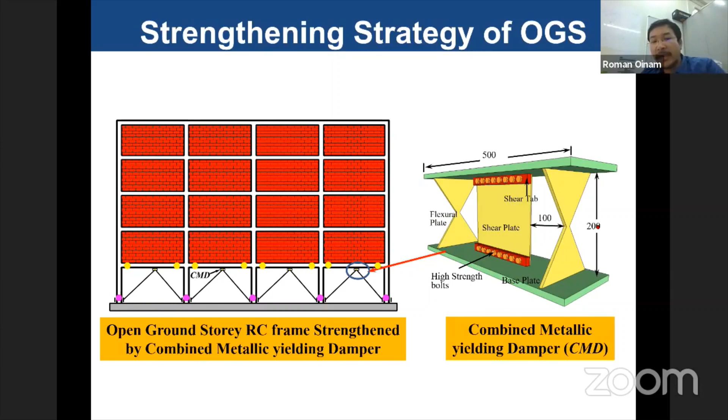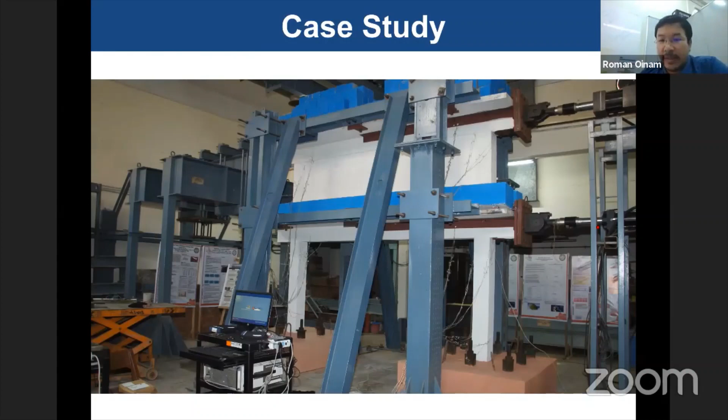This device is installed in the open ground story, and we did a numerical study to check the effectiveness, comparing without the damper to with the damper. As a case study, I cast a full scale, half scale, Ground+1 open ground story, put the damper in, and did pseudodynamic testing. Pseudodynamic testing is a kind of real earthquake test without a shake table, performed with the help of an actuator only.

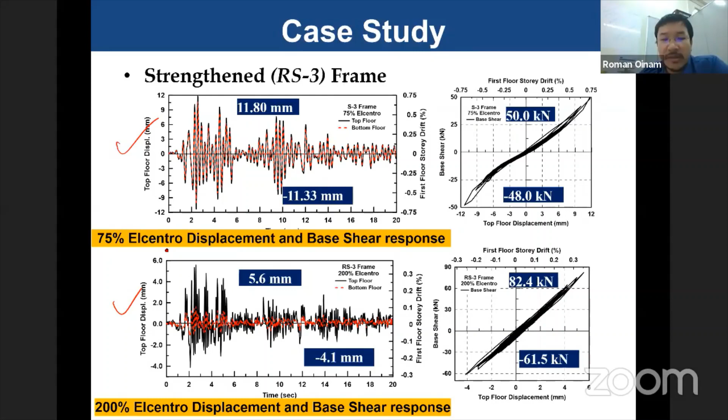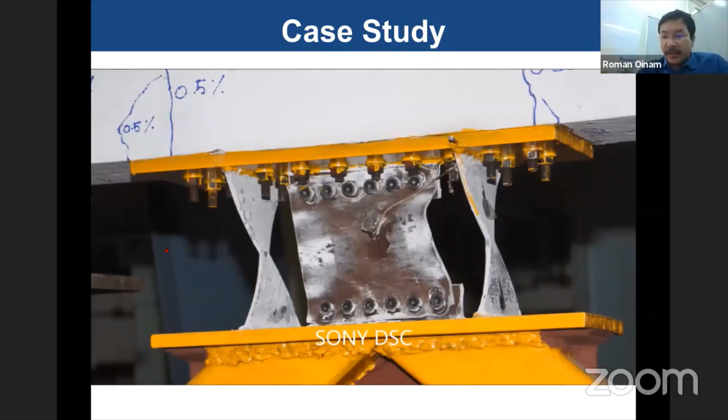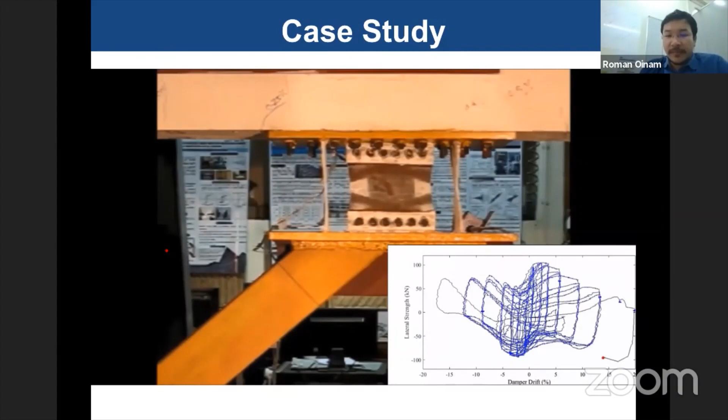This is the overall condition of the damper at the end of the testing. Let's see how the damper deforms for the same experiment - this is only the damper portion without the frame. This is the overall deformation at the end of the experiment. The column got damaged and the beam-column joint was severely damaged, and the damper deformation is shown here.

In terms of effectiveness, usually an open ground story building collapses within just 0.75 to 1.2 drift - this is the collapse region. But in our experiment, it goes up to 2.3. This means this much extra drift we are able to gain, and this is equivalent to the performance of a normal reinforced concrete, fully infilled building. So whatever damage is observed here is at the level of 2.3, meaning our experiment is performing perfectly fine.

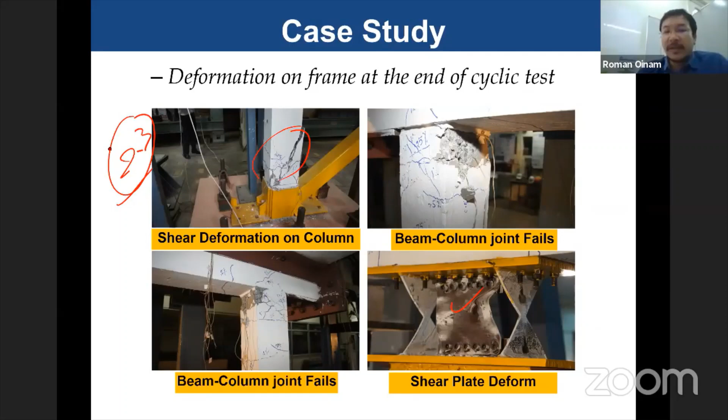Usually an open ground story fails at 0.75 to 1.2 drift, but we are able to move up to 2.3. For normal reinforced concrete, the drift capacity is around 2.5. So now, more or less, our drift capacity is comparable to a normal reinforced concrete building, meaning our device is working effectively.

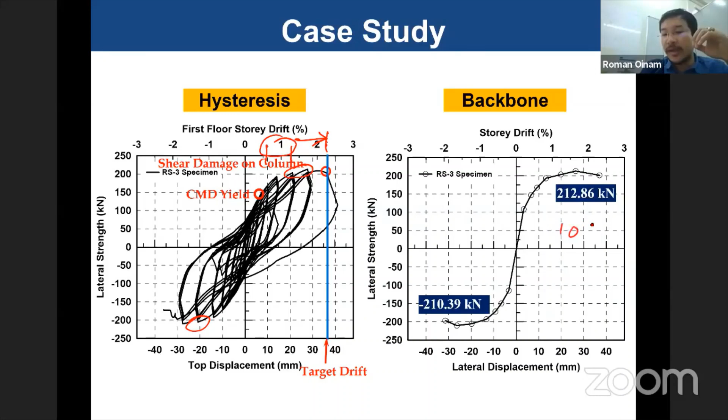This is the conclusion: energy dissipation of the strengthened structure is improved because of the contribution from the CMD, and the deformed configuration confirms that, end plates of the CMD, there is no premature instability, and the proposed connection scheme works effectively. Soft story behavior, one of the most important issues in building behavior, has been eliminated - meaning we can now solve the soft story issue in existing buildings with the help of the proposed device.

So this is my overall content. I took almost 8 minutes extra, sorry for that. I covered energy dissipation, different dampers and their working mechanisms, energy absorbers, and explained extensively local modification, global modification, and the effect of earthquakes and how earthquakes are generated.

The earthquake section alone is a separate subject called earthquake engineering that would normally be discussed on its own, but I compressed it within 15 minutes. Retrofitting and rehabilitation is also a totally different area that I compressed into a very limited time. I introduced performance-based seismic design compared to the current Indian seismic code. So within this limited time period, I tried to cover many topics - if I missed some points, sorry for that.

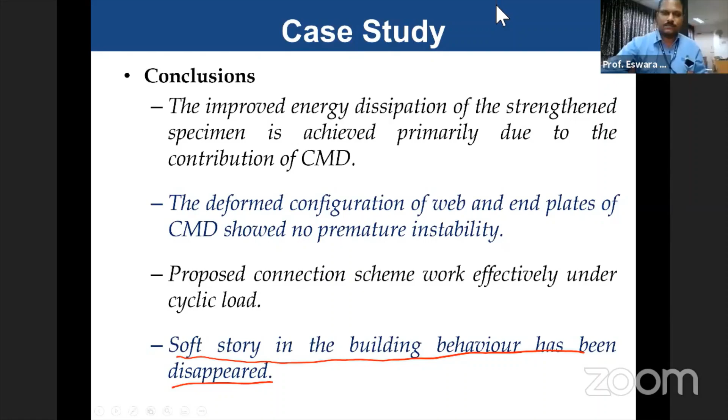Thank you very much, Dr. Romanbabu. I'll just summarize whatever we have discussed till now, on advances in repair, rehabilitation, and retrofitting methodologies and practices. Under this, he discussed elaborately the causes of earthquakes and the types of earthquakes, plate tectonics, seismic waves that are responsible for earthquakes, then some examples of past earthquakes and their failures, and the seismic zones available in India.

Then he focused on irregularities in buildings that are responsible for earthquake failures, then the source of deficiency that exists in buildings, then the mode of retrofitting—either local or global—that we need to decide, then the application of energy absorbers and dissipators in seismic retrofitting, such as SFRC, FRP, and mechanical dampers.